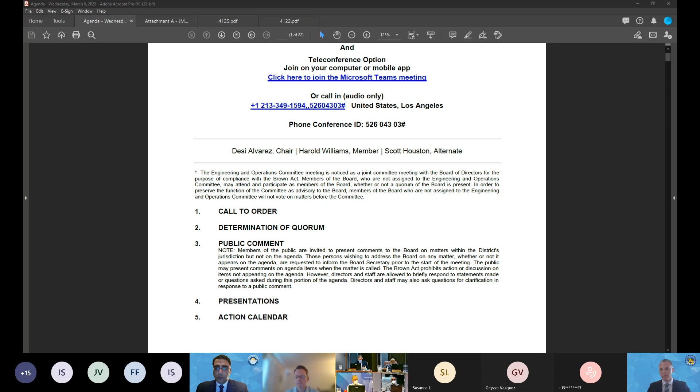First item is a project update for the Juanita Millender-McDonald Carson Regional Water Recycling Plant Phase 2 expansion project. So with that, if you take over, Mr. General Manager. Yes, thank you very much, Chairman Alvarez. As you mentioned, item 6A is related to our Juanita Millender-McDonald Carson Regional Water Recycling Plant and our expansion project. For this presentation today, we do have Kevin Cullen, our Engineer 3, here to present on this item.

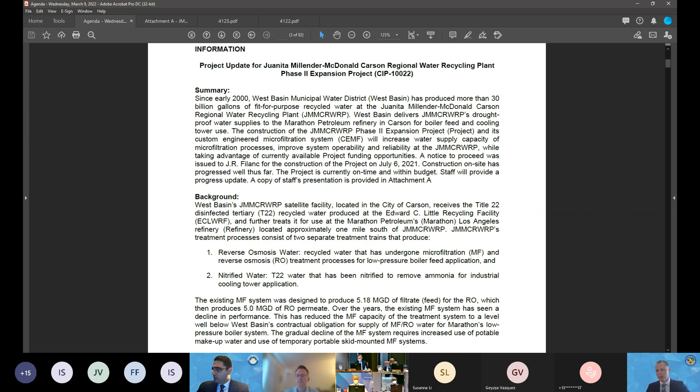Thank you, EJ. I'll share my screen. Everyone see that all right? Yes. Alrighty. Thanks, EJ. Good afternoon, members of the committee and board. As mentioned, I'll be providing a project update on our Juanita Millender-McDonald Carson Regional Water Recycling Plant Phase 2 expansion project. Before I jump into the project update, a high-level overview of the plant.

It is located in the city of Carson at 21029 South Wilmington Avenue. It is fed by a 42-inch pipeline from the Edward C. Little Water Recycling Facility in El Segundo, and its influent water, source water, is our disinfected tertiary water, commonly called Title 22. The original Phase 1 construction of the plant in 1999 consisted of 2 treatment trains, the first being a low-pressure boiler feed water at approximately 5.18 million gallons per day of microfiltration, followed by reverse osmosis, and a second treatment train of nitrified water quality for cooling tower applications at about 0.9 million gallons per day using biological aerated filtration.

Kevin, before you leave that slide, maybe you can go over, you mentioned the 42-inch pipeline, and talk a little bit about that. Is that kind of a backbone to the overall system? Correct, it is a backbone. It helps feed most of the recycled water customers and satellite facilities south of Edward C. Little. It consists of 3 sections - we divide it into the north, south, and middle segments. And yeah, it certainly is the backbone. Thank you. No problem.

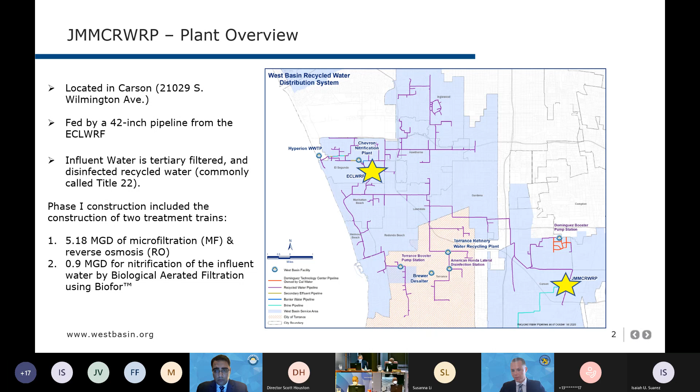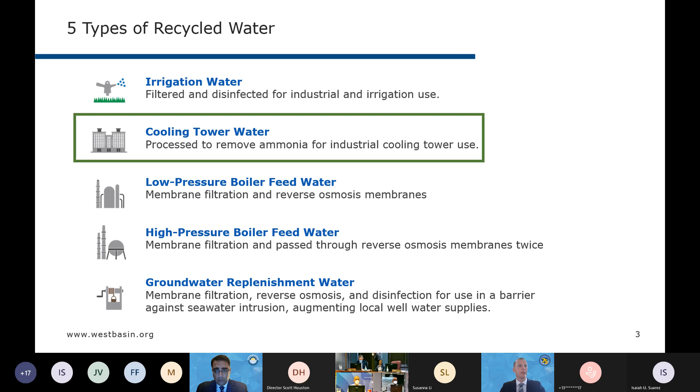As mentioned, out of the Carson plant, we're producing 2 types of water, 2 of the 5 that West Basin produces, the first being the cooling tower water, and the second being a low-pressure boiler feed water. The main driver of the Phase 2 expansion project was the replacement of the existing microfiltration system. The existing microfiltration system has been in operation since the original construction, and since then has had some diminished capacity. It had an original capacity of about 5.18 MGD as mentioned, and today we're seeing about 3 to 3.5 MGD out of it.

So with the new project, we're looking at installing a new custom engineered microfiltration system. We stand to increase total production capacity by about 1.88 MGD. And by doing so, we'll restore and improve upon the original design capacity of the plant while operating under an N+1 operations mode. What this means is that we'll basically have a redundant rack of microfiltration modules, so we'll be able to meet capacity and some while having an offline rack of microfiltration units, whether that be for maintenance purposes or cleaning or what have you. By increasing the capacity, it will also eliminate the need for the temporary portable ultrafiltration system, often referred to as the PUF system.

The PUF was installed in 2016 and has helped make up some of that diminished capacity. We'll also be privy to some reduced downtime, because the existing system is so old, it tends to have quite a bit of problems. So with a newer system, we'll have much reduced downtime.

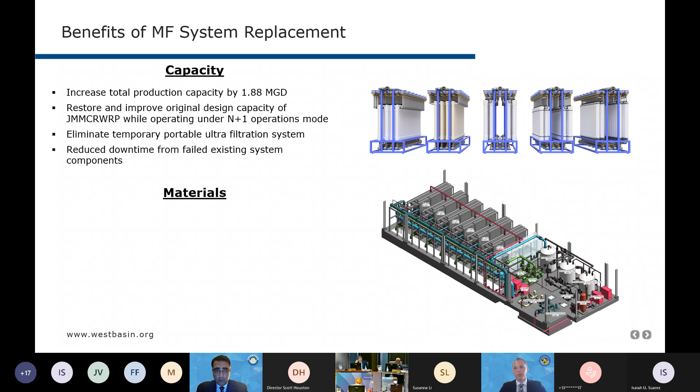One of the other main benefits of replacing the existing microfiltration system with a new custom engineered system is the materials of the membrane, new membranes. Since the late 90s, membrane technology has improved considerably. So with the new system, we'll be looking to switch membrane materials from polypropylene membranes to polyvinylidene fluoride, often called PVDF.

One of the biggest advantages of using PVDF is that it can be cleaned using sodium hypochlorite, which isn't compatible with the existing polypropylene membranes. This will allow us to get better membrane recovery with the organics and ammonia in our source water from Hyperion, which often leads to irreversible fouling in our membranes. So cleaning with sodium hypochlorite will allow us to get better long-term performance out of the membranes.

Also, with a new custom engineered system, we'll be able to competitively bid future membrane replacements. As stated in the name, custom engineered microfiltration system, it can accommodate up to 6 different membranes. This will allow us, as water quality changes or pricing in membranes changes, when the time comes to replace them, to fit the system with a different membrane if needed.

Another advantage of the new system will be the open platform PLC. A lot of the existing systems that West Basin has are packaged systems from a single manufacturer, so a lot of the controls are proprietary. With an open platform PLC, we'll be able to customize backwash sequences, air scour sequences, and things of that nature for better performance.

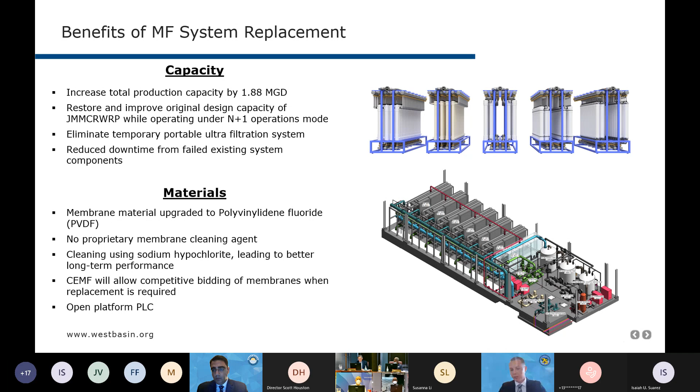Now for the project update. On the right-hand side here, I have a quick time lapse that I'd like to show that'll highlight some of the progress at the custom engineered microfiltration area. We do have a camera on site that provides site security and also records construction progress throughout the whole duration. So this time lapse just focuses on the custom engineered area.

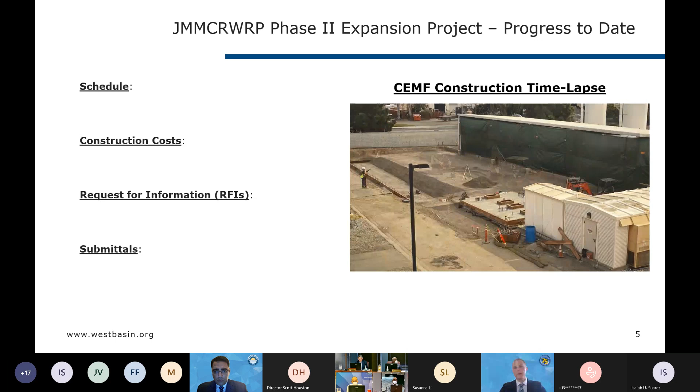There we go, pretty neat. Here's where we stand today. What you saw accomplished in that video was a considerable amount of over excavation, the installation of our 2 underground tanks, the CIP waste tank and the EQ tank, as well as the installation of a lot of underground conduit and process piping. On the left-hand side you can see the pipe trench that'll sit underneath the microfiltration system.

As far as schedule goes, the construction contract is 660 days from notice to proceed to final completion. To date, 239 days have elapsed, so about 36% of the schedule has been consumed.

On the cost side, the construction base contract is $20.98 million. To date, the contractor has earned about $3.14 million, which is about 15%. We do expect this to ramp up, as project costs usually follow somewhat of an S curve as construction progresses.

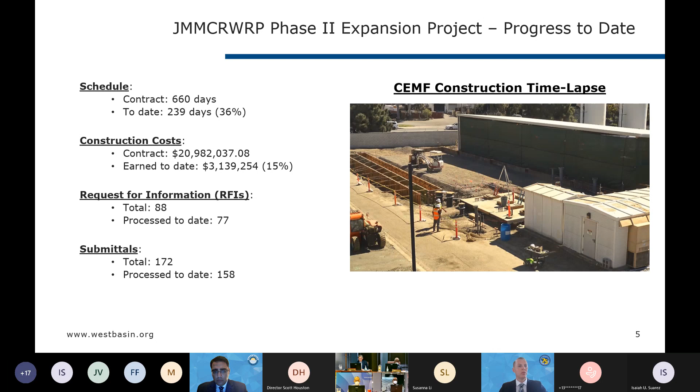On the documentation side, the contractor to date has submitted a total of 88 RFIs, and with the help of Suez, our design engineer Hazen and Sawyer, and our construction management team Boutier, we've processed 77 to date. As far as submittals go, 172 to date total, and 158 have been processed.

The Phase 2 project is one of 6 West Basin projects under the project labor agreement that West Basin holds with the Los Angeles and Orange County Building and Construction Trades Councils and the signatory craft councils and unions. The PLA categorizes craft workers into 3 categories.

Tier 1 being local residents, those that live within zip codes in the West Basin service area. Tier 2, those zip codes that fall within LA County. And then third, at-risk workers.

An at-risk worker is defined as a worker who meets 2 of the following criteria: being homeless, a custodial single parent, those receiving public assistance, those having a criminal justice record, those that are unemployed, or those that have a gross household income below 50% of the median income level.

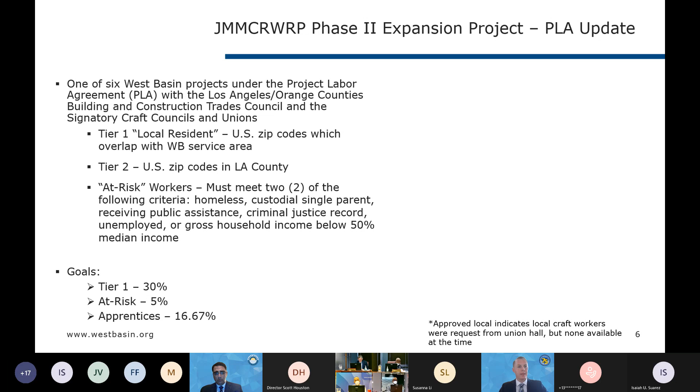For the goals outlined within the PLA, West Basin is striving to provide 30% of the total work hours from Tier 1, West Basin service area residents. We're also striving to provide 5% of the total labor hours from at-risk workers, and 16.67% of the man hours on the project coming from apprentices.

So to date, here's how the work hours have shaped up.

Kevin, if you wouldn't mind pausing for just 1 second, we do have a question from Director Williams concerning the PLA and the types of jobs that are available. So this is not any old kind of construction job. What jobs are available for these folks, and the at-risk people? What kind of jobs are they going to be doing? And of course, the apprenticeship jobs—I would assume that they cover the whole thing.

That's a great question, Director Williams. Any of the workers could fall under any of the craft councils or the trade unions—those being laborers, operators, carpenters, electricians. So any of the 3 categories there could fall under any of the trades.

So who checks? We actually have a labor compliance consultant who helps track all the hours for us and make sure all the paperwork's in order, and that is the Solis group. Okay, very good, thank you.

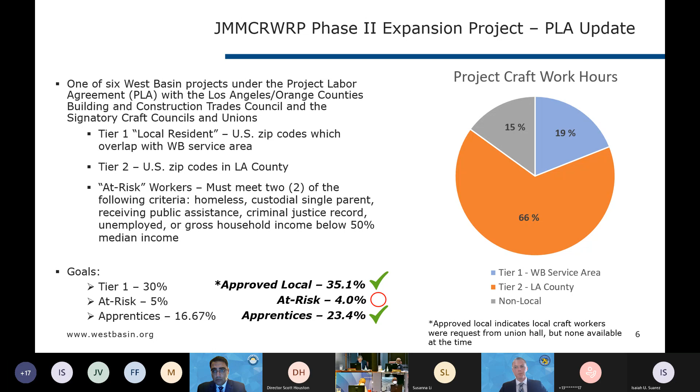Now for some construction progress photos. The first photo we have here, a lot of the progress to date has been with yard piping, the installation of a new potable water backup system for the 3 on-site tanks. So here you see an installation of our new 20-inch HDPE W1 pipeline. This is a 100-foot section of pipe being installed by the contractor. And you can also see there that the pipe is sleeved in a blue sleeve per LA County Department of Public Health regulations.

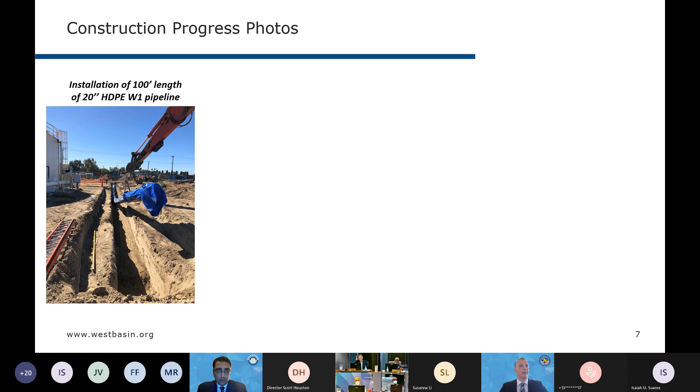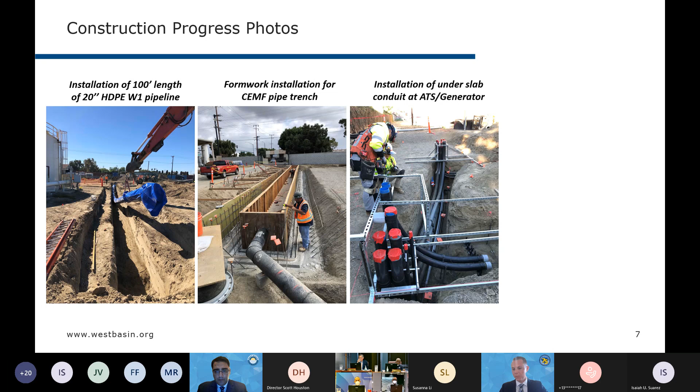Next picture here is some formwork being installed for the pipe trench at the CEMF area. And then next up we have the installation of some underslab electrical work, conduit at our automatic transfer switch and generator area. We have a very small on-site generator that's going to be providing backup to some of the product water pumps for Marathon Refinery.

And finally here we have a picture of 2 pressure control valves that sit on the microfiltration feed piping. Since we've issued a notice to proceed to the contractor, these valves have given us quite some trouble. You can see on the bottom there that we have multiple plates welded over the bottom. They've begun to leak pretty severely, so we will be looking to replace these using some of the previously approved board contingency funding. And they do fall above the $35,000 threshold, so we'll be looking to do that via change order.

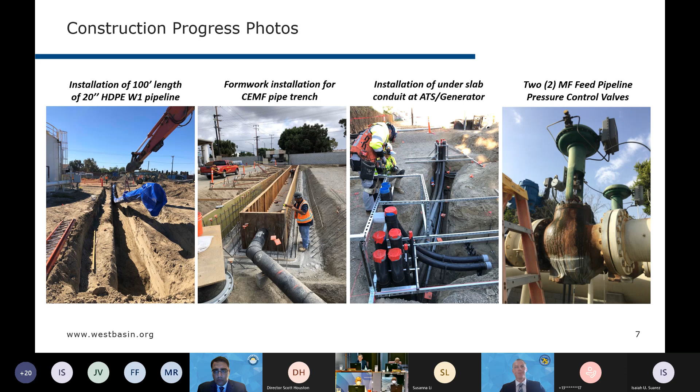Looking forward, some of the upcoming construction activities: we're going to continue with the yard piping. We're going to move out of the site and move on to Dominguez Street. The W1 pipeline comes from our potable water area, which is in the northeast corner there. So over the next couple weeks, the contractor is going to be installing the pipeline on Dominguez Street, which is a private access road that is going to be used by the district and Shell. It is owned by Shell. So we've developed a good working relationship with them, and that work's going to take place over the next couple weeks.

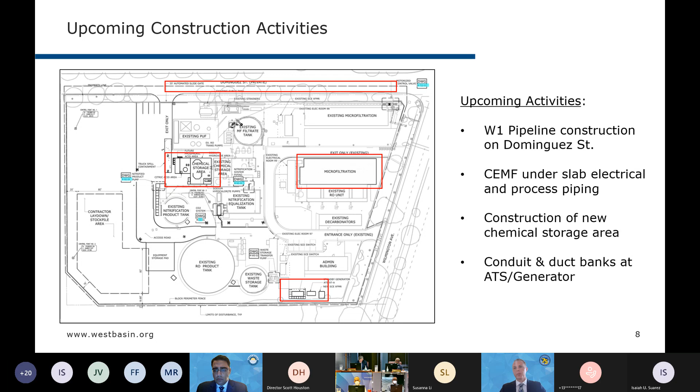We'll also continue with progress at the CEMF area with underslab electrical and process piping installation. We'll also continue with the construction of the new chemical storage area. We're currently relocating a chemical dosing system to make room for the new chemical storage area to be constructed. And then we'll also continue with the conduit and duct banks at our generator area.

And with that concludes my project update, and I'd be happy to answer any questions.

Mr. Chairman, I think I mentioned before that the first 6 years of my career I was a draftsman. So if you look at this site map, you can't read it. It looks very well detailed, got a lot of good information there, but when you get my age it's difficult to read stuff like this. So if you have to put fewer items on the map, that's fine, but what's on the map should be readable at a glance. I'd appreciate it if you give it some time when developing these, because these are great maps and I know you have AutoCAD systems that can do just about anything. I'd appreciate it, thank you.

Director Williams, if you'd like, we can get you an individual copy of these drawings. I apologize for it being small in the presentation, but we can get you an actual copy if you'd like. Well, that's fine, but when you put them inside the presentation, they should be able to read it. Okay, that's all I'm saying. Thank you, good work nevertheless.

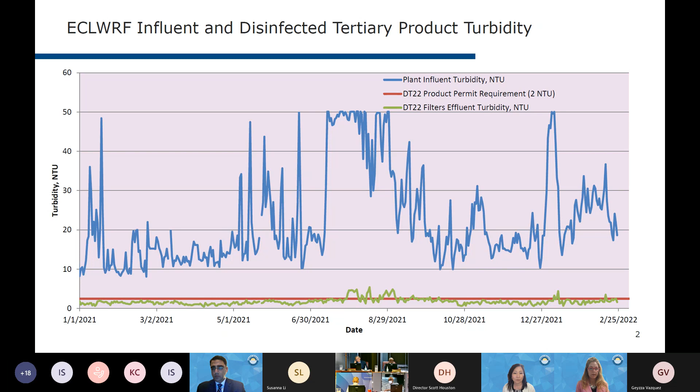So moving on to the next slide, we'll go over some maintenance highlights. First, I want to focus on the maintenance activities going on at our solids facilities.

The rail system that holds up the 140 plates gave way. Pins were broken, we have broken carriages, which led to a number of steel plates coming off the guard. Ultimately, what it means is that the filter press has been offline since February 15th.

Currently, we have only one dewatering press to process double the amount of solids that we've been handling, and more so than that, we have to modify our solids hauling management protocol.

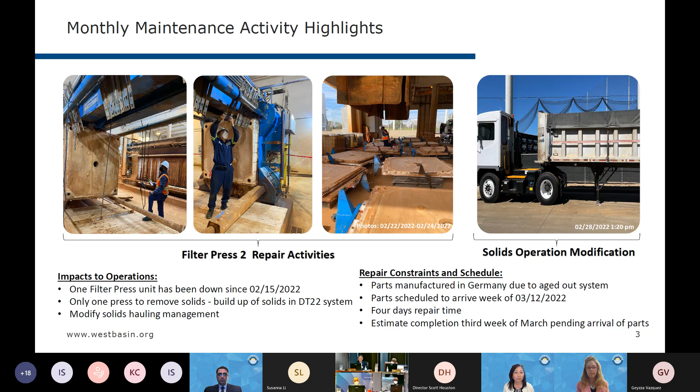It will take about 4 days to repair, and hopefully we'll get 2 presses back online, and we'll be able to ramp up barrier production as well, because if we ramp up barrier we will have more solids to process. With that, can we go to the next slide?

There's a couple of other maintenance activities that went on. As part of our insurance requirement, there are a number of inspections that have to be conducted every 2 to 3 years. The photo on the left is one of the inspection trips that just took place a couple of weeks ago at Torrance, which required a 4-hour shutdown, inspecting one of the pressure vessels.

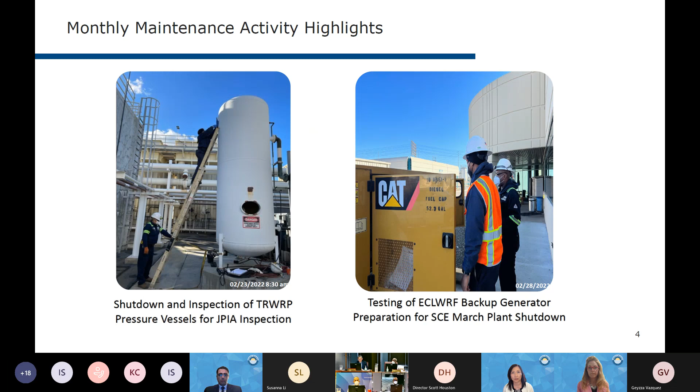And the photo on the right is our maintenance staff testing and preparing for the SCE shutdown that took place just this week, doing some checks on our backup generator. Next slide, please.

As we started to inform the board of upcoming solicitations, there are 3 solicitations coming out in the next 2 to 3 months. The first solicitation is our solids hauling contract. We'll be addressing the issue of truck driver shortages and fuel prices increasing, so we're going out to hopefully get more competition and see where we land with the solids hauling costs.

The second study that will be going out for RFP is the electrical system study. Every 5 years we're required to test our electrical system, make sure it passes the arc flash requirement, and also have consultants go through all our electrical equipment to make sure they are labeled correctly. That is going out in April.

And then, last but not least, the on-call operation technical services contract will be going out for a new contract, hopefully with a different consultant. This contract really supports our operations department with any operational needs and studies, and a large component of it is to help support our membrane monitoring and optimization effort. That RFP will also be going out in April.

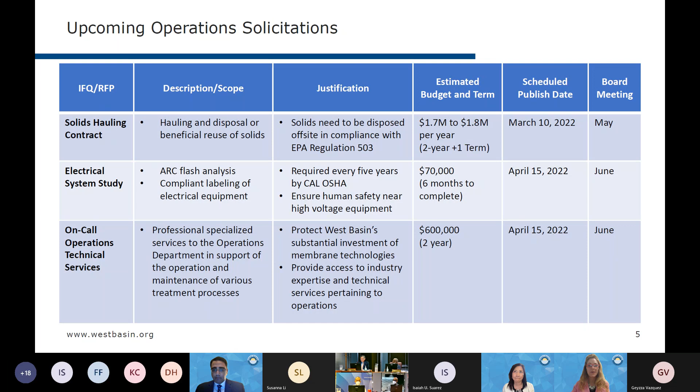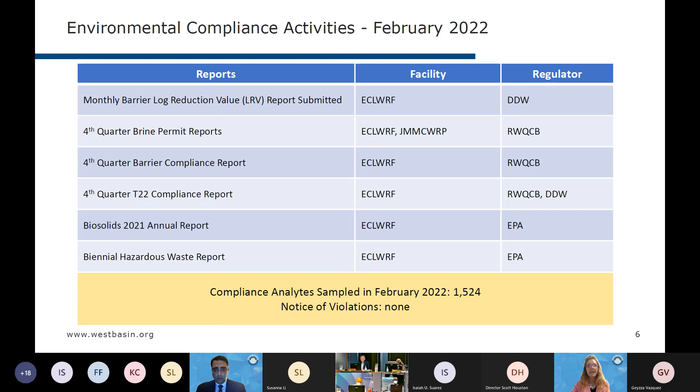Okay, thank you. If we could proceed then to the next slide, please, which is on page 28 of the packet - this is just our quick overview of compliance activities. The first quarter of the year is always a real big time for compliance activities: a lot of quarterly reports, working on annual reports, a lot of supplemental things required, which you see here, and no notices of violation for the month of February. If we go to the next slide, please, you'll see we have a nice summary, always good to share.

I proudly mention that our district is very progressive on permitting and reporting. There's never a reluctance to disclose and engage in all the proper activity. Coming up for the next fiscal year, there will be a lot of activity on the compliance side. Wanted to make sure the board was aware, and we'll keep bringing these to you, as some will require public hearings.

For example, our 2 brine permits, at ECL and at JWPCP and Carson, both allow us to discharge to the ocean. They go through LA County Sanitation's line and then LA City's line, but they also require us to have permits. In addition, at ECL it goes into Hyperion's 5 Mile line, which hits federal waters, so the EPA is also involved. So you have to go through 2 separate hearings.

For the Title 22 general permit, we've had the same permit almost since we started here. It was revised in 2001. Those permits don't expire, but the brine permits have to be renewed every 5 years. General permits, like the barrier and Title 22, do not technically expire, but they have to be updated. In 2014 and 2015, a new general permit was implemented for the state of California, and all agencies were required within 5 years to comply with that.

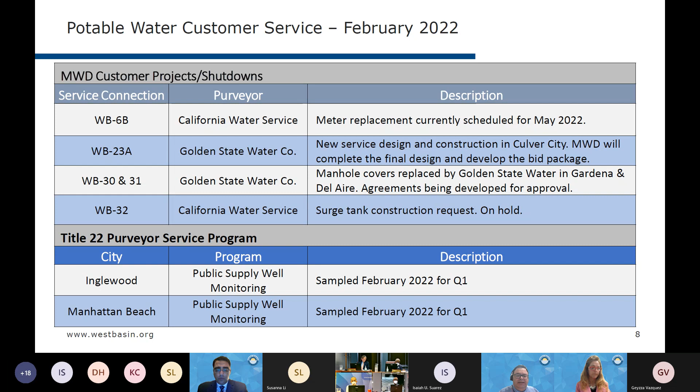This is our monthly potable water customer service update for the month of February. The only item I want to highlight for the Metropolitan Water District customer projects is there will be a meter replacement scheduled for WB6B, which belongs to California Water Service Company. Metropolitan Water District is working with both West Basin and Cal Water to coordinate this outage, between May 16th and May 20th. For the Title 22 Purveyor Service Program, I just wanted to highlight that the samples were already taken for the month of February.

This slide is a summary of our recycled water distribution system activities. I wanted to mention we did have one leak in February in the city of Inglewood, on Prairie and 105th Street, on February 9th. It was a minor leak that was repaired the same day without any issues. Infomark also collected a total of 90 water samples throughout the month, conducted 2 spot chlorinations also in the city of Inglewood, responded to 572 dig alerts, and our operations technician conducted 18 site inspections.

The photographs on the bottom left are of the repair conducted for the air vac service line that was replaced. The 2 middle photographs are of regularly scheduled maintenance activities for air vacuum valves, and the 2 photographs on the right are an example of a valve that was exercised in the month of February.

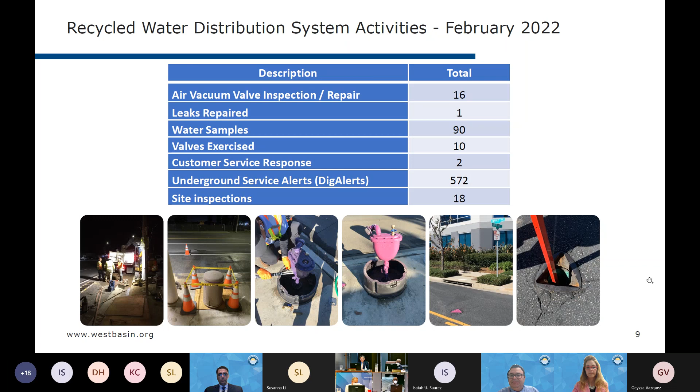Moving on to new recycled water connections. This is a summary of 6 sites that are currently under construction that we are working with to connect to the recycled water system. I also want to mention that on page 21 of the board package, we have an attachment listing the additional sites.

Overall there are 22 sites we anticipate will connect to the recycled water system. There was a question at the board workshop about which sites were forecasted in the budget. For example, Los Angeles Southwest College was included in the additional demands for the next fiscal year, along with sites within the SoFi development, Torrance Tech Center, and the Inglewood Basketball and Entertainment Center. We anticipate a portion of that site will be connected in the next fiscal year.

So I will be putting together a summary of the sites included for the budget and provide those to EJ so he can provide them to the board. Next slide, please.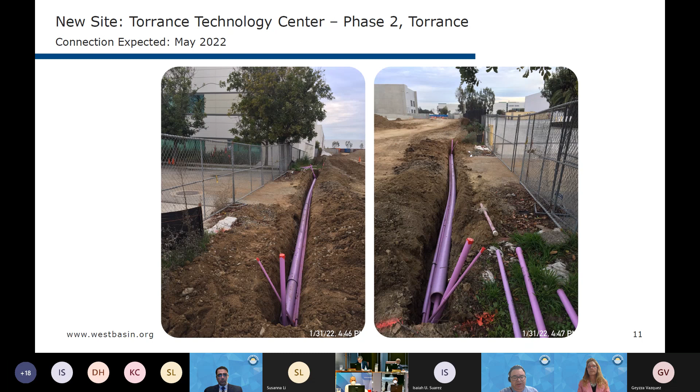This is one of the sites within the SoFi Stadium development, the Hollywood Park Retail, an outdoor mall. Staff have been working with the Department of Public Health to finalize this connection. These are photographs of a recent inspection conducted to ensure there are no cross connections, and we anticipate this site will be connected in July of this year.

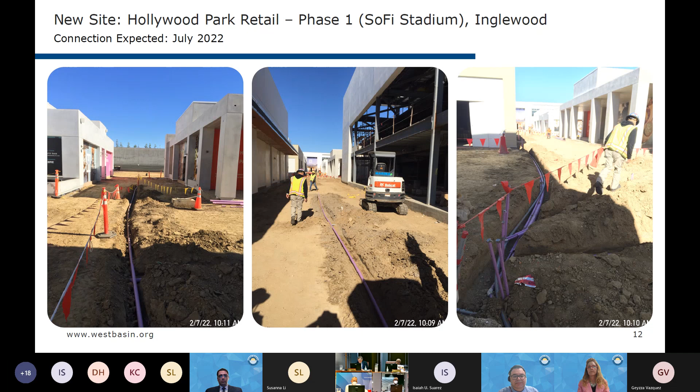Moving on, this is a table of existing recycled water sites already connected to the recycled water system, but they are undergoing modifications, and staff is providing support to go through the Department of Public Health approval. I wanted to highlight several sites from here. Next slide, please.

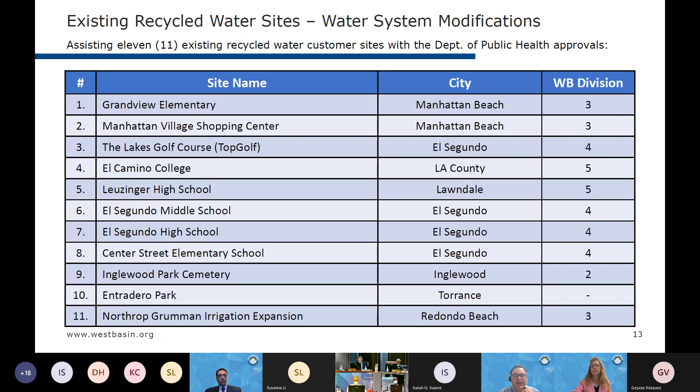This is the Manhattan Village Shopping Center, a site already connected but expanding its irrigation system, on the southern portion of that facility. This is a recent site inspection with the Department of Public Health, and we anticipate this will be finalized in April of this year. Next slide, please.

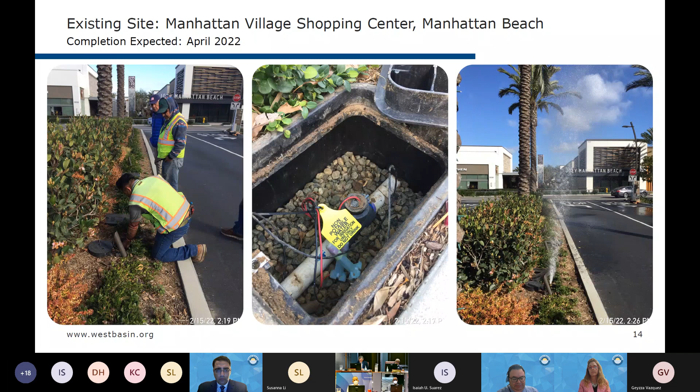The Lakes Golf Course, we've been providing monthly updates on this site. These are photographs of a recent site inspection. The site is now entirely approved to use recycled water, and we anticipate they will start using it in the portion near the parking lot within the next couple of weeks, with recycled water for their entire irrigation system by their target grand opening next month. Next slide, please.

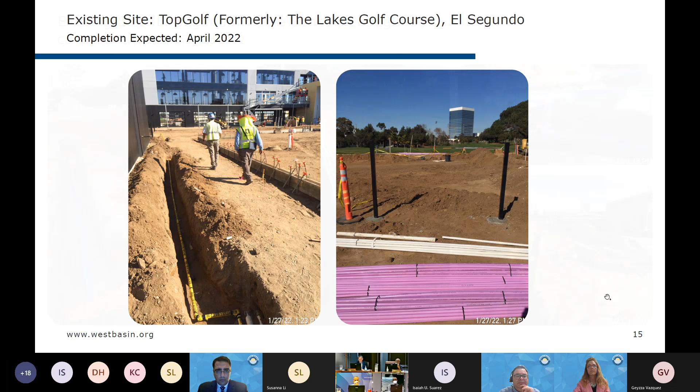Finally, we've been working with El Segundo Middle School, which is constructing a new gymnasium. Staff have been working with the Department of Public Health to conduct inspections of the new potable water pipelines recently installed, to ensure there are no cross connections between potable water and recycled water. We anticipate this work will be finalized in August of this year. Next slide.

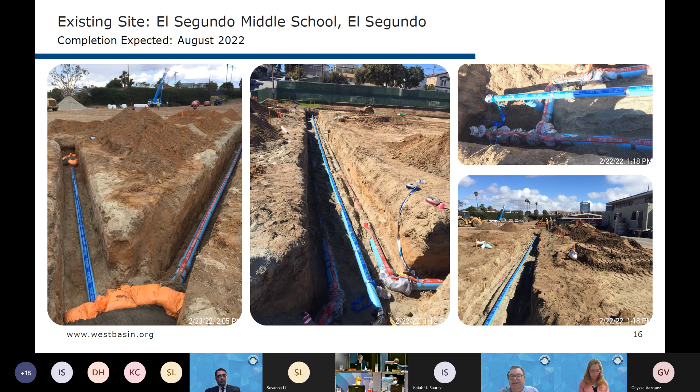That concludes our report, and we'd be happy to answer any questions.

Director Williams, do you have any follow-up questions? No, thank you. Any of the other directors have any questions or comments? No, thank you. I don't have any other questions.

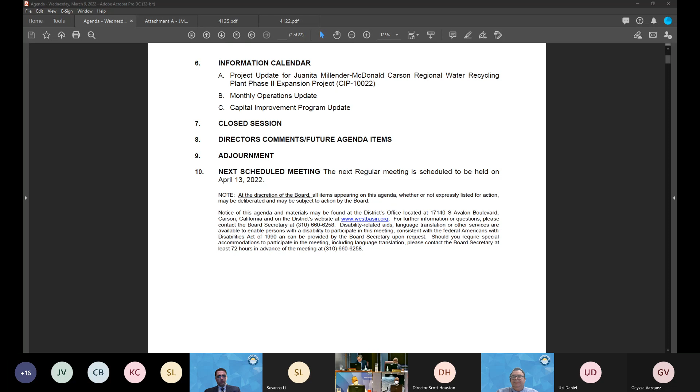Thank you very much. We will move on to the last item on the information calendar, the capital improvement program update. That is correct, Chairman Alvarez. This begins on packet page 40 for the capital improvement program update. For this presentation, we have Wendell Johnson, our manager of engineering, here to present.

If you could please turn to page 42 in your agenda packet.

I've got a couple things to share with the board today. We're providing you with our monthly CIP update report. In addition, we've provided a sample draft budget project sheet with information we plan on including in this year's cycle of the budget. Each year, listening to feedback from this committee and individual board members on information they'd like to see in the budget book, we've produced on page 80 a sample sheet of a typical budget project sheet, which will be either part of the CIP in the current budget book or a standalone budget book, given direction on what the board would like to do.

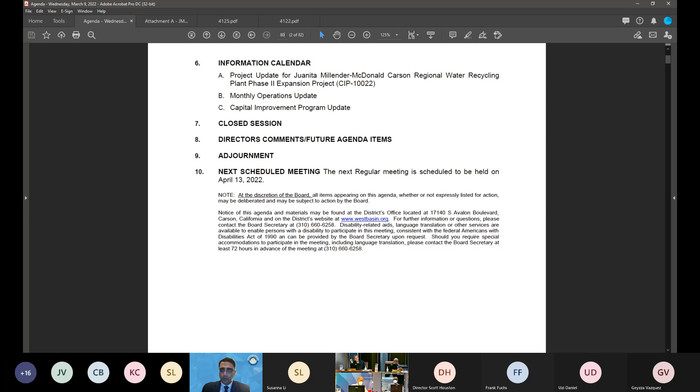So if board members could turn to page 80 in your agenda packet. Again, I want to apologize in advance, we tried to put a lot of information on this sheet, so it may be difficult to actually view it. But essentially, this has been a bit of an evolution in the department. Each year, additional information or a new format is presented to the board to include as part of our operation budget for the district. And in this case, this is the CIP, or the capital improvement type projects.

What we have here is a typical sheet, and I put the JMM Carson project on there simply because we talked about it earlier, so we can focus on the content being provided by this budget sheet for the budget book. I'm welcoming any input from board members on what they'd like to see, what works for them, or what doesn't. But I can briefly go over what we hope to include.

If we look on the left-hand side, when this is put into the budget book, this is a typical sheet, and it's 2 pages, 2 8.5 by 10 pages. When you open it up, you have the project and project information on the 2 sheets, side by side, so you can have all the information for one particular project right in front of you.

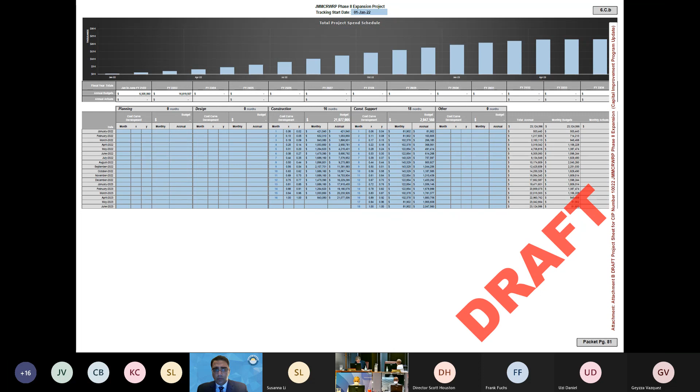If we go to page 82 in your agenda packet, again, these are the assumptions being made for the project. We have initially a pretty good estimate of the cost of the project, and then we make assumptions as to what different areas...

...need additional expenses. In this case, we're trying to capture engineering labor costs, operation labor costs, construction management costs. This project's design has already been done, but there are also other typical project activities that include other charges for material testing and construction type support.

And so this provides a detailed look at what the total project expenses will be. I think the board has asked for this on several occasions - how much labor we're involved in.

Again, this is an initial draft sheet, and this project would tie in with other projects that we have. We have about 40 projects that will be in this upcoming fiscal year. This also provides us a check to see if we have the appropriate level of staffing, the appropriate level of budget for internal costs and internal charges, or have we oversubscribed?

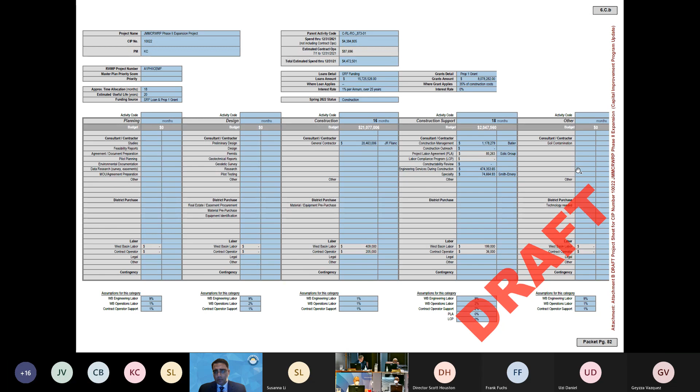Typically, what we provided beginning on page 42 in your agenda packet is generally what we provide as a monthly update. We could provide additional information on a quarterly basis if the director would like to take a deeper dive into some of the projects. This will always be available if we want to take a deeper dive.

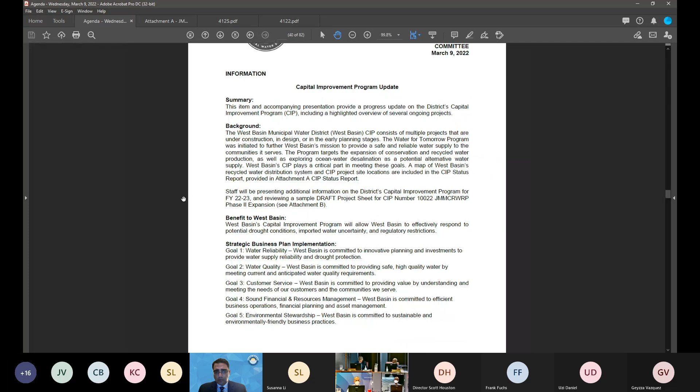Exactly, the actual report we're sitting here reviewing would not be this information. Right, this is the information we want to share on how these projects are developed, to show how detailed we take a look at the cost in order to keep a project on track, and so we don't have unanticipated expenditures. So this is for Director Alvarez, right? Oh, absolutely, he has an inquiring mind.

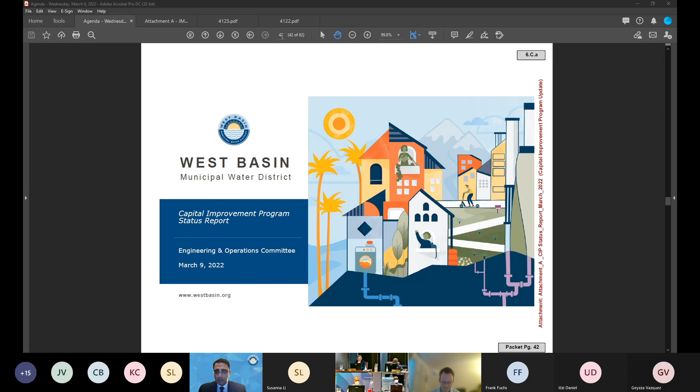Thank you. I do have some comments, but before, are there any other comments from other board members? I do not have any comments on this, Director Alvarez, but maybe when you're done, I wanted to ask a couple questions on some current projects, but that's okay for the moment.

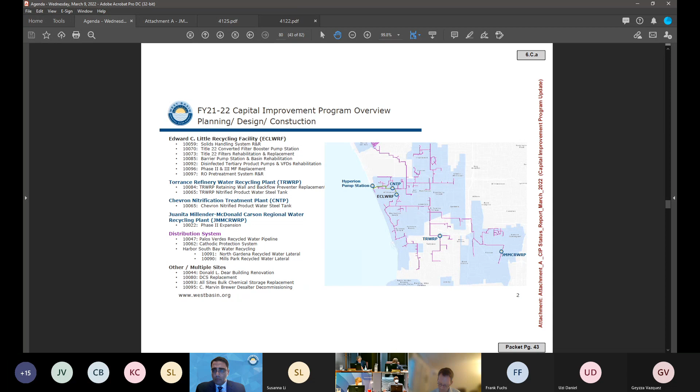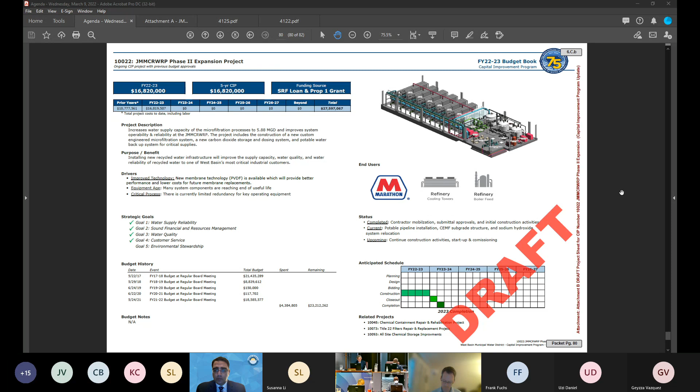So on something like this, where you've got the overall project cost, it's still kind of a floating item out there, but if I can speak to it and you can tell me if that's right or wrong: the total expenditures when this project is completed is anticipated to be $27,597,000. Correct. Okay, and so when we look at the budget history in the lower left-hand corner of the page, there was budgeting done in FY 17-18, 18-19.

So for the last 5 years, you show the budgeting, but those monies bounce all over the place. So if I want to know how much money was actually set aside for the project, can we have a column that dedicates or identifies that, or is that something we should try to work on? Because it'd be nice to know, for this year's CIP, we have a project that's already been budgeted, and here's where the money is for the $27,597,000, but we're going to ask for another $1.2 million, or whatever it might be. I'm just giving you scenarios. It'd be nice to know what's already committed. And the second question, you kind of have it here, the source of funds.

In this particular case, it's a combination of the state revolving loan fund and the Prop 1 grant. Is that 100% of it? So this project's 100%, the $27 million is coming out of the state revolving loan fund and Prop 1 grant? No, and again this is a draft, and my intention is to give you the breakdown of where the funds are coming from, because in addition to the state fund and Prop 1, we have some participation from Cal Water in this particular project. In our future revision of this, we will have a detailed breakdown of the composition of the monies.

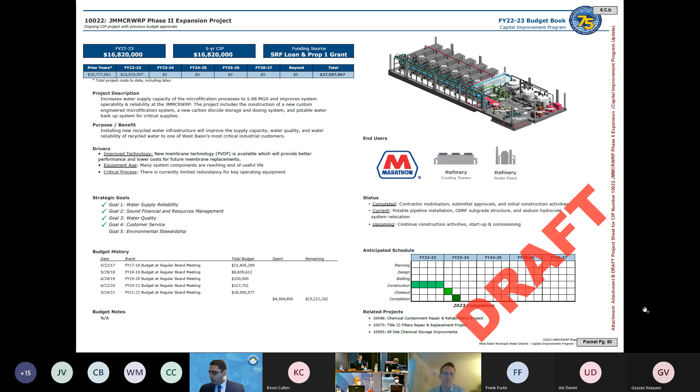Okay, thank you, that's good information. So as you polish this draft, those are some of the questions I would have. I'd like to see a little more clarification on those issues. Thank you for your comments. Great to have the attached pages, but I think that's getting a lot into the weeds.

But thank you very much. I think this is very productive, and it would be nice to have this when we go through the budget for all the projects and say this is how much we're going to allocate in the CIP and where the money's going.

Okay, Director Houston, you had asked that we go back and revisit some of the projects you passed up the first opportunity to address. Yes, I did. We always get a second chance at the apple here. We like to please, I passed it up. Can you hear me okay? Yes, we can hear you. Okay, wonderful.

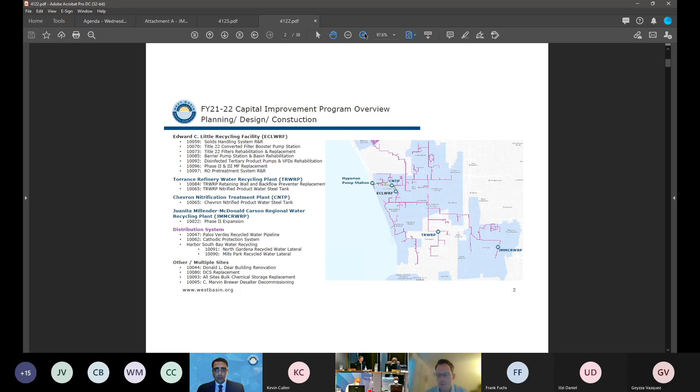Just two things. One is the slide deck, slide 15, the Chevron nitrified product water steel tank. That's page 56 of our packet. What's the status of this, how soon? I see it's going to go out to bid. And then what do you think is the estimated time of completion on that tank?

If I could, I'd ask Camille or Veronica to provide some information for the director. Good afternoon, directors. The project is currently at the 100% design submittal, and we've been talking with Chevron to determine the best time for them to also go into shutdown mode. They've advised us they'll be shutting down some of their units at the beginning of next year, so we're planning on working around that schedule to coordinate and do the shutdown at that time.

Okay, and how long does it take to get accomplished? I believe the bypass system is probably one of the longest items to build, so it's going to be approximately 8 months for the whole construction. But again, Chevron is going to be on a bypass system, so they'll be able to have some flows. Okay, got it. Great, thank you, Veronica.

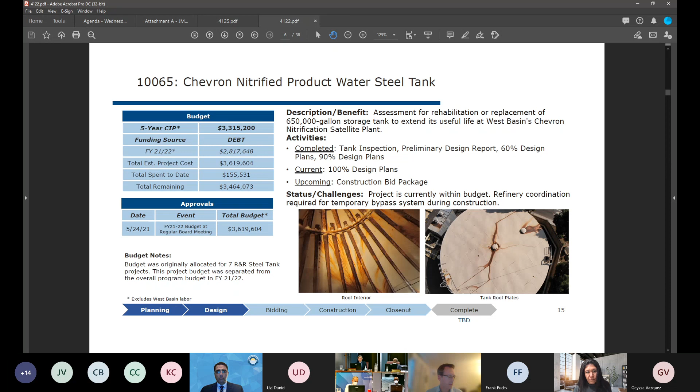My other question was earlier in the presentation, slide 6, the Harbor South Bay Water Recycling Program, which we always hear about, but I noticed at the bottom it says remaining, we need to finalize the agreement. And a couple of the projects right after that said the same story, need to finalize and execute the agreement. So can you tell us what the status is on that? I understand we have authorization of this money, but what's the deal with finalizing the agreement?

Yes, we've been working with the Army Corps of Engineers representative, and we've provided comments into the agreement. I believe there are some agreements changing in regards to their own templates, so they're accommodating for those. They do have a project description, so all the work is already done from our part. We're just waiting to get that final draft of the agreement for our final review and be able to execute or present it to the board and execute.

Okay, so you think it'll be in a couple of months or something like that? Yes, that's our hope. Okay, alright, very good. Thank you, and thank you, Mr. Chair.

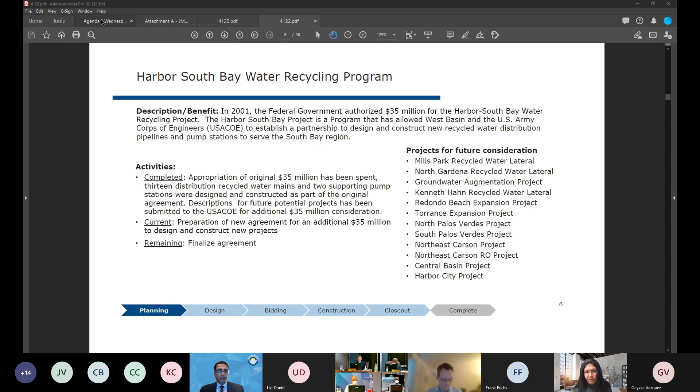You're welcome. Any other comments? Okay, if not, that concludes the information calendar. I don't believe we have any closed session items. That is correct, Mr. Chairman. Okay, director's comments for future agenda items.

Director Williams? No, thank you. I will be submitting a couple of items for next month's agenda. And how about any other board members? No, thank you.